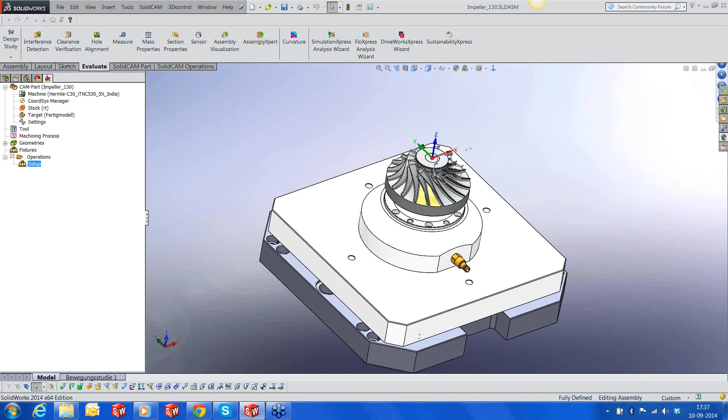We're going to see how iMachining combined with simultaneous 5-axis helps us to machine this impeller. Generally, the impellers are done using a different process from what you're going to see today, especially the roughing. The first portion of the part is turned, and what is turned basically is this particular profile. This profile is completely turned. It's either turned on a regular 2-axis lathe, or even in some cases these are milled on 3-axis machines.

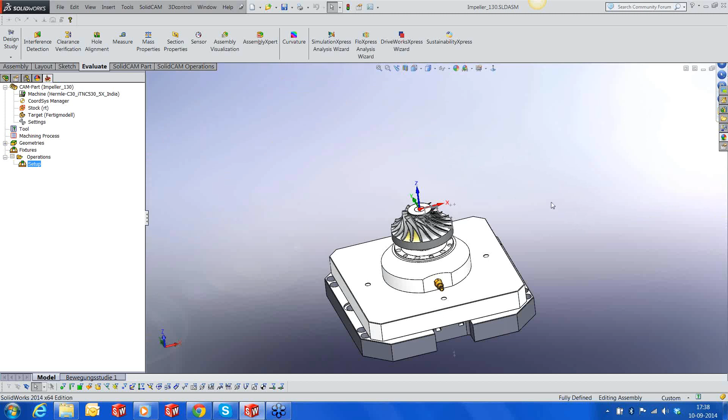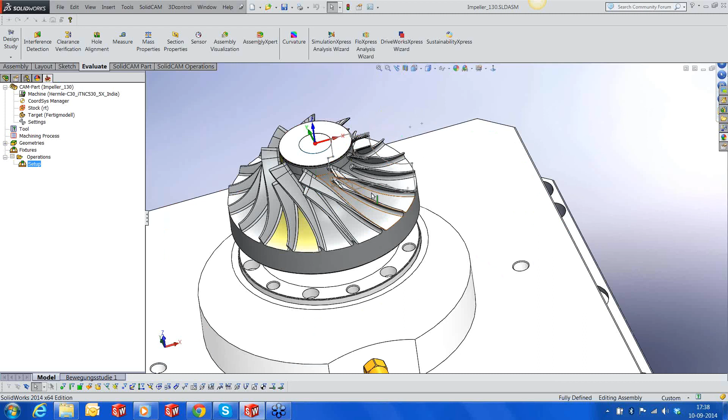But today, because this particular customer ABC has only one machine, and that's a 5-axis machine, he doesn't want to cut in 3-axis and then do 5-axis roughing. He wants to challenge, he wants to improve his productivity by cutting down on this roughing time and finishing time of this particular area, and then machine the entire impeller blades using simultaneous 5-axis.

Right, so what we have today, to start off with, I've used a Hermle C30 machine on which this part is going to be cut, and we have the impeller model and a fixture that's going to hold this. And this is a pretty nice kind of fixture. It's a positive holding. It has got extremely rigid holding, and my machine is also pretty new, so I could really be aggressive in my cutting parameters.

So what I have done today is I have selected Hermle as my machine, and we have used 16MnCr5 material to cut this part. 16MnCr5 has an ultimate tensile strength of about 680 megapascals, and there's a new feature that's come up in SolidCAM 2014, and that's the machinability factor.

Many times when you take up a particular UTS, or the ultimate tensile strength, SolidCAM generates a host of cutting conditions in iMachining, and then you pick one of those cutting conditions and take it to the machine, and then you realize that this material looks to be much harder than what its ultimate tensile strength indicates. Or it could be the other way around. You take that to the machine and you realize when it starts cutting, this material looks much softer than what the ultimate tensile strength actually indicates.

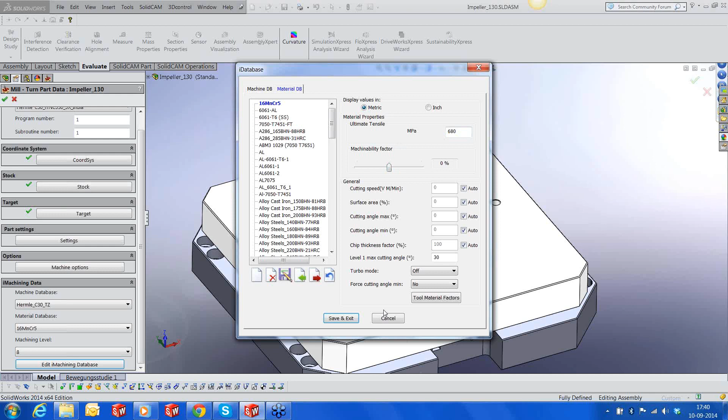I'm going to put it back to 0 and save and exit. We're going to use level 8, so it's the most aggressive level of cutting. Towards the end of this webinar, I will show you a video of the same part using the same fixtures on a Hermle C30 being cut. So you will get a better idea of what this whole thing looks like. All right, so I'm going to accept this.

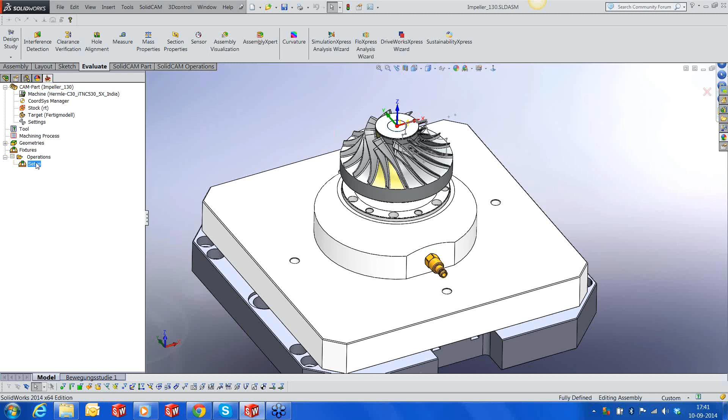And what we have today is we're going to use a 16 millimeter end mill from Hoffmann, and we're going to cut this part. So let me add iMachining 3D. Okay. Tool, I'm going to pick the end mill. This is a 16 millimeter end mill. It's using a Weldon shank, a Weldon holder rather. It's 5 flutes. This is actually a tool from Hoffmann. Okay. Let's select this tool. Its cutting length is 48 millimeters.

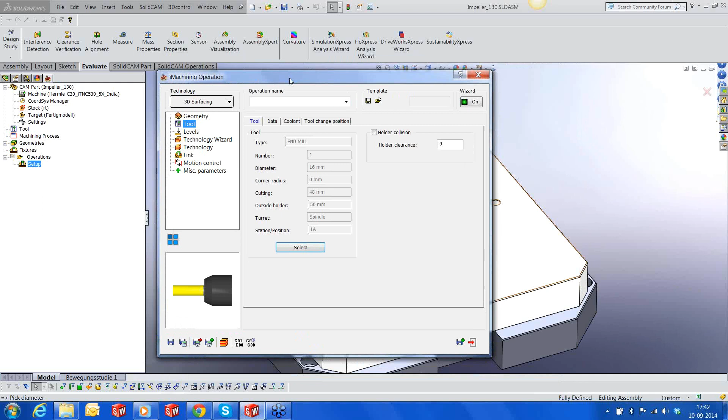Levels. My lower level is actually not that, but my lower level is somewhere on this fillet, and I will give another delta value of about -2, so that I'm going to push that down to -42.247. Okay. We have defined the material and machine. We have the geometry here. We have picked the tool, levels, and then SolidCAM immediately has calculated the cutting condition for me.

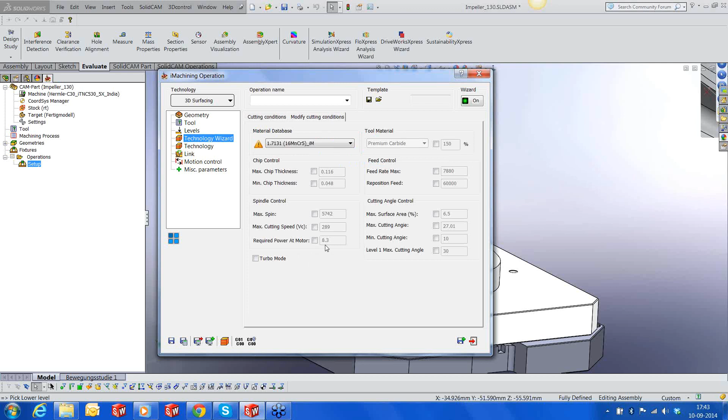At level 8, which is really the most aggressive level that we can have in the regular iMachining, not the turbo, it's calculated an RPM of 5,742, a feed rate of 7.88 meters, a maximum step over of 0.87, a minimum step over of 0.12. That corresponds to a VC of 289 and a max chip thickness of 0.11 with a maximum cutting angle of 27 degrees and a minimum cutting angle of 10 degrees. Now, out of the 15 kilowatts that the machine has on its spindle, it's going to use only 8.3 kilowatts on this cut, which is almost like 50%.

Okay, now if you look back at the tool, this is a special grade from Hoffmann. It's the premium carbide, or what we call the ultra-fine carbide. Basically, you have two grades. We have the normal carbide, where the grains are of normal size, and then there is a fine grade, where the grains of carbide are really very small, much thinner than the regular carbide.

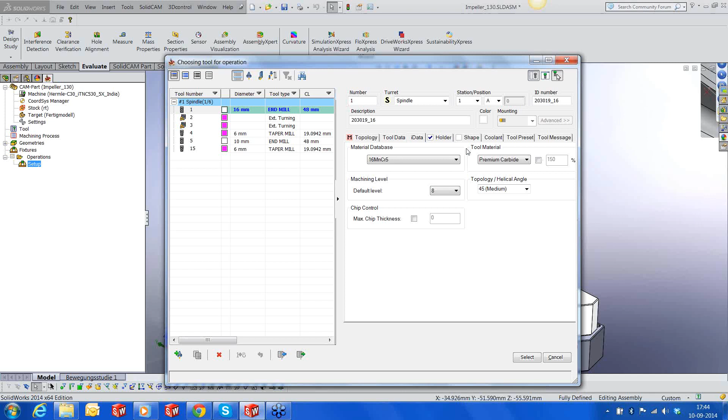In such cases, when the binding of the carbide is much better, the parameters can go as high as 150% of the regular carbide. So this is what iMachining does. It allows you to pick the type of material of the tool. So if I pick premium carbide, it jumps up to 150%. All right. So we have selected this. We have selected our level. Parameters are calculated automatically. Let's go to the technology.

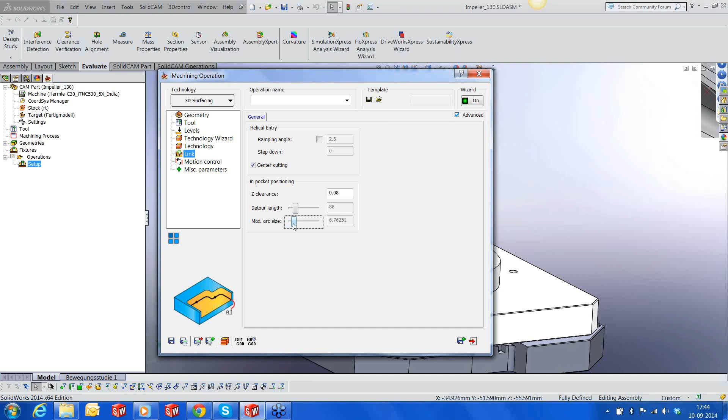I would like to keep about 0.4 millimeter on these walls, and a tool path tolerance of about 4 microns, doesn't matter. Right, and we just need to change our arc size. Since we're using an 8 diameter cutter, I'll get it close to 8 millimeters. Okay, that should be good enough. Okay.

And then we have a new thing coming up again in iMachining, and that's called constant chip thickness control for arcs. Generally what happens in iMachining is it keeps the feed rate almost constant when it's going over the arc, because it generates the pattern in such a way that the chip thickness is maintained constant even when going over arcs, especially the corners.

This particular slider here allows us to decrease the feed rates when it is going over arcs to match certain machines, because on certain machines it is virtually not possible to travel at the same feed rates when going over the arc. Thereby, the feed rate drops and the chip thickness decreases. Thereby, it affects the tool life.

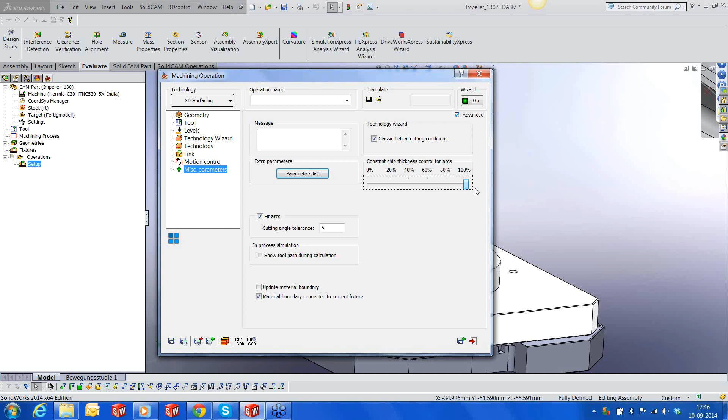We can actually pull down the slider and reduce the feed rate over arcs. This makes it easier for machines, especially the older ones, which can't go at the same feed rate over the arc. It tries to maintain lower feed rates when moving over the arc. All right, this is a new machine, so it doesn't have any such issues. Let me save this, and let's hit the calculate button. This could take about 40 seconds.

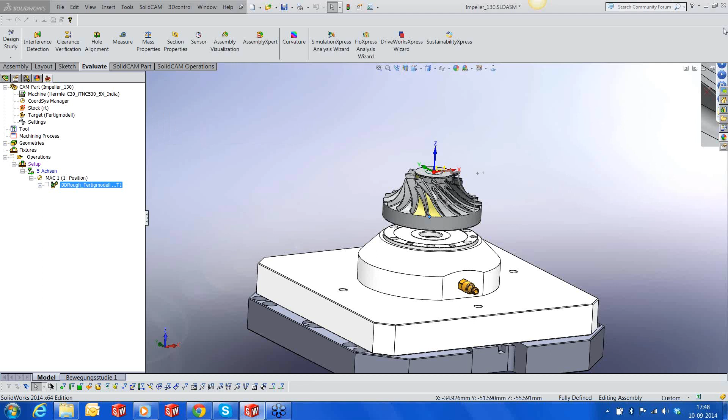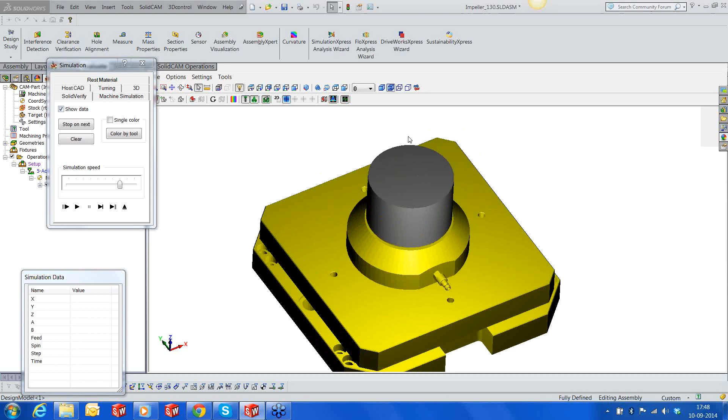Okay, the calculation is done. Let's look at how the toolpath looks. Nice. So that's how the toolpath looks. Let's run the simulation on Solid Verify. So that's how my stock looks, along with these fixture components. Okay, let's zoom in so that you can see it much better. Okay, there we go.

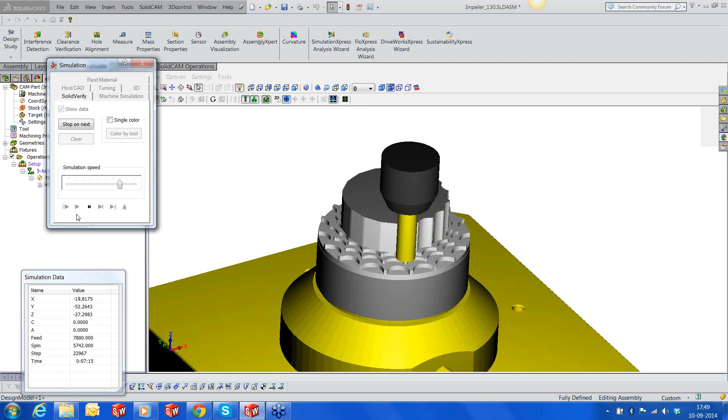It's taken about 40 millimeters at one go, and then it is generating the scallops. This is the step-up technology of iMachining. Since the scallop is pretty high, you can see the staircases coming up. Else you would have seen a very fine scallop. The scallop is pretty high. It's about 2.6 millimeters, so it's creating that staircase kind of effect.

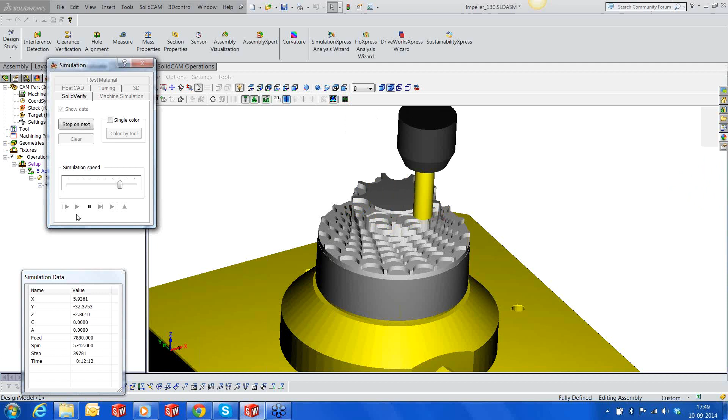All right, so in about 12 minutes, it has roughed out this part. Sometimes it looks like it's even faster than turning it. So we can straight away do iMachining 3D, and it's ready for machining. All right.

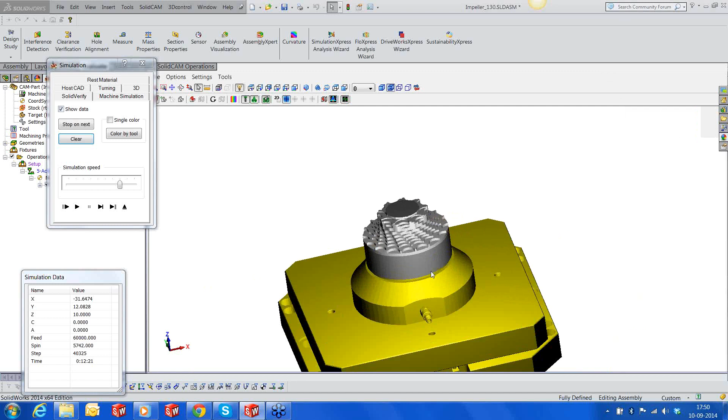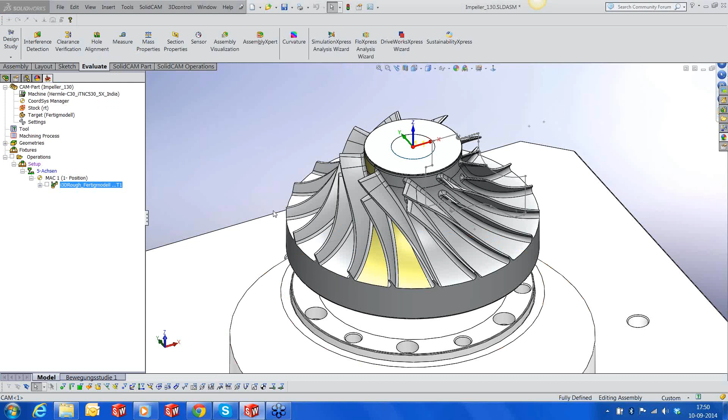So once we have the roughing done, let's move to the next toolpath. These are basically 5-axis toolpaths. So I'm going to start with the roughing of this blade area here. For that, I'm going to use multi-blade machining. This is a special module inside SolidCAM, or rather an application-based module which is meant only to cut impellers. It doesn't matter what kind of impeller, but it is meant to cut only impellers.

So what you have is a very simple interface. We have first a strategy. We have 3 strategies: offset from hub, offset from shroud, offset from hub and shroud. Now, because this is an impeller, if you look at the blades, the width of the blade on the trailing edge and the width of the blade here is different. The width of the blade on the leading edge is much bigger than the width here.

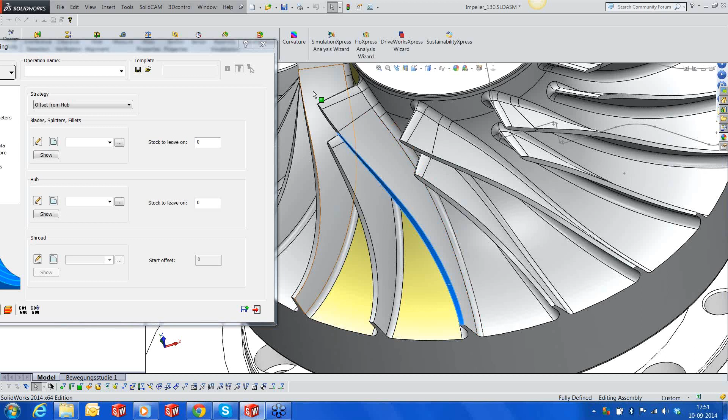So if I use morphing between the hub and the shroud, I will have several passes which will cut nicely here, but when they come back on this side, they are actually going to rub. They're not going to do anything because of the morphing technique. Which means that I might end up having a problem or lower tool life because it's just rubbing. So I'm going to use a different kind of technique this time.

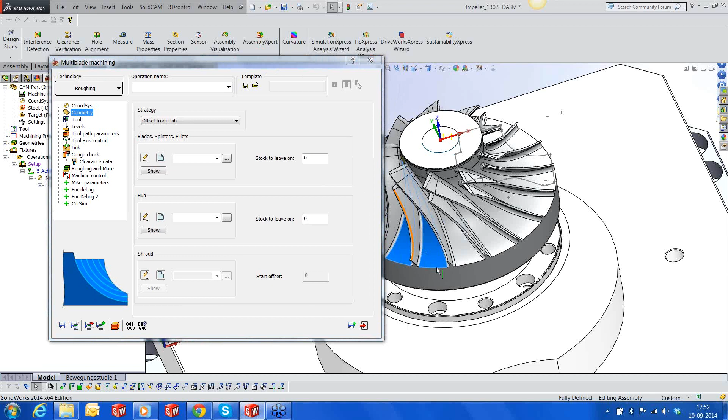I will use offset from the hub that is parallel to this particular surface. In such cases, we will not have the issue of tool rubbing because the distribution of cuts will be according to this particular surface.

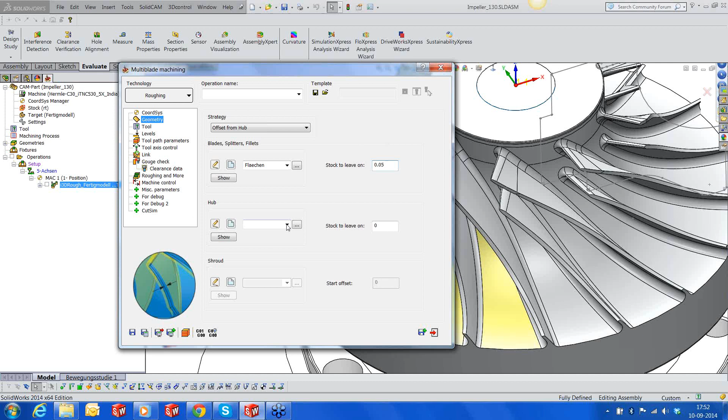All right, so we're going to pick the first set of surfaces. Those are the surfaces, which is basically the blades, main blades, and the splitter, including the fillets. So I will click OK, and I will leave a stock of about 50 microns. On the hub, I would like to pick this surface up here. Select OK. Maybe 50 microns also on this side.

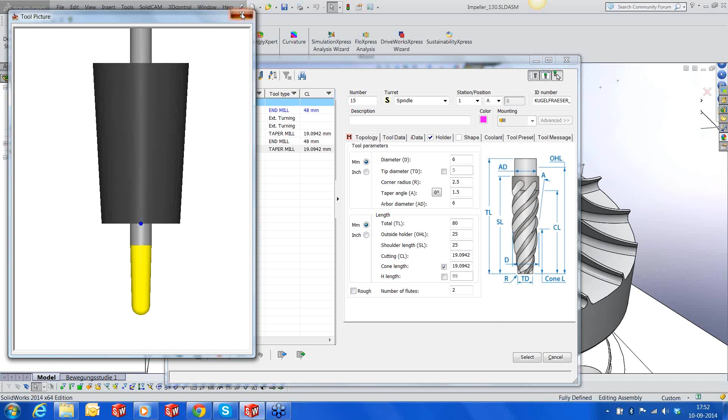Let's go to the tool. I'll select a Hoffmann 6mm taper ball nose. This is how it's going to look like. So we're using the shortest possible tool for roughing. It allows us to be more aggressive with our parameters when you use a shorter tool. On the clearance, we're using a sphere. This is directly from the system. It'll auto detect the position and the dimension.

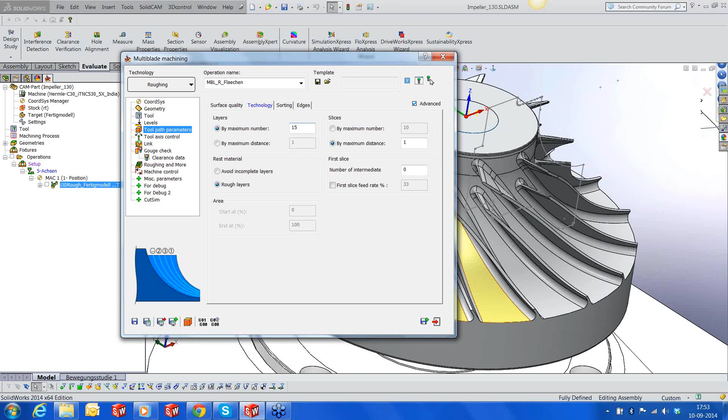The toolpath parameters in the technology, I would like to have a maximum of 15 cuts and a maximum of 10 cuts in the area. All right. Let's go to sorting. It's going to be a zigzag, and it's going to start from the leading edge. That means my tool will start cutting from the leading edge side.

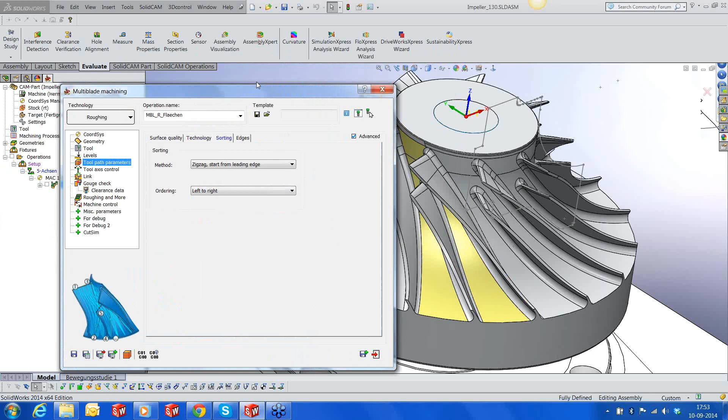And the ordering, we have got about 4 types of ordering. First type of ordering is it will start from this face and it will go up to this face. That we call left to right. Or it could start from this face and end up on this face. That's called right to left. And then you have got another method which starts from the center and goes away to either of the faces, either in climb milling or conventional. So those are the other 2 options. I'm going to use the default left to right, so I'm going to start from this blade and end up on this blade.

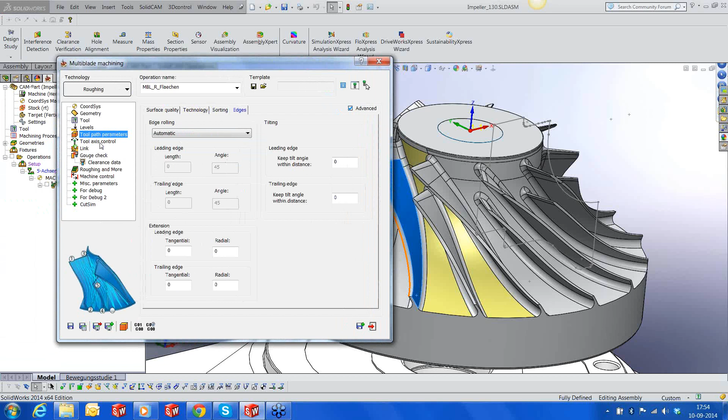Edges, I'd like to keep that automatic. In the tool axis control, you can see that we have very few parameters to work with. What we have new in SolidCAM 2014 SP2 is that earlier we just had one limit angle. Now we have got both the limits, minimum and maximum, so as to take care of machines which can't tilt too much. But with Hermle, we don't have an issue because it goes plus minus 110, so it's a pretty big range. Otherwise, we could control our limits out here.

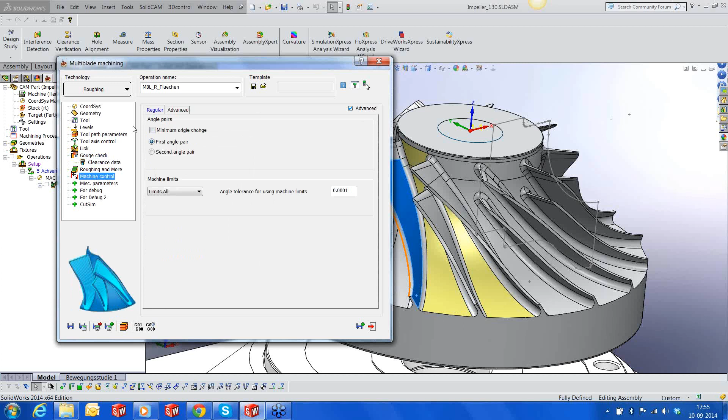Link, again, is automatic. You can see in the application-specific module of SolidCAM, almost everything is automated. That means here the user intervention is kept to a bare minimum. Gouge check only when we need it. All right, so we already have everything. So I'm going to save this and run the calculation.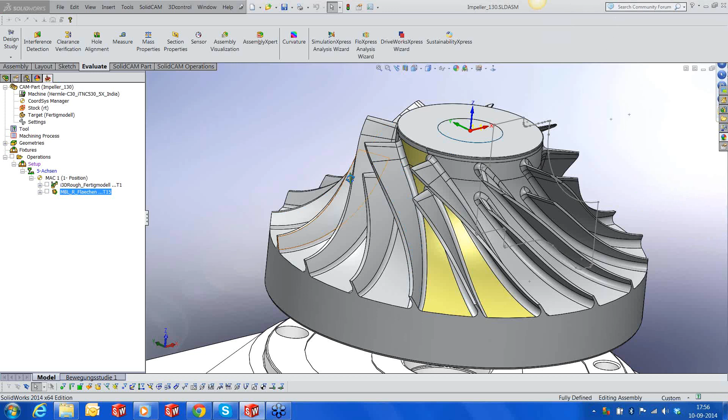The calculation is done. So let's see the results. That's nice. So you can see that there is no rubbing happening on the trailing edge side, basically because the cuts are distributed according to this particular surface, the edge of the surface. So we don't have the rubbing happening.

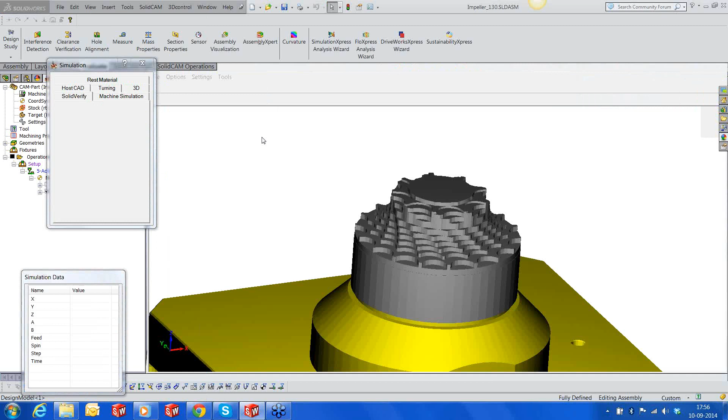So let's run the simulation. Let's go to the Solid Verify, and then we'll also see machine simulation. This is our initial stock. We can start.

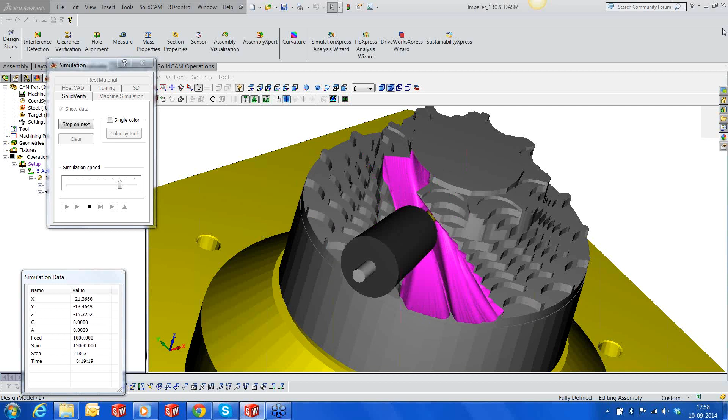This is how our roughing of a 5-axis impeller would look like. Now, since we do have some material left over on the blades, let's also look at some of the finishing options that we have inside multi-blade machining. So let's switch off the toolpath and add multi-blade, blade finishing. So we have got roughing, blade finishing, hub finishing, and fillet finishing. So let's put on the blade finishing.

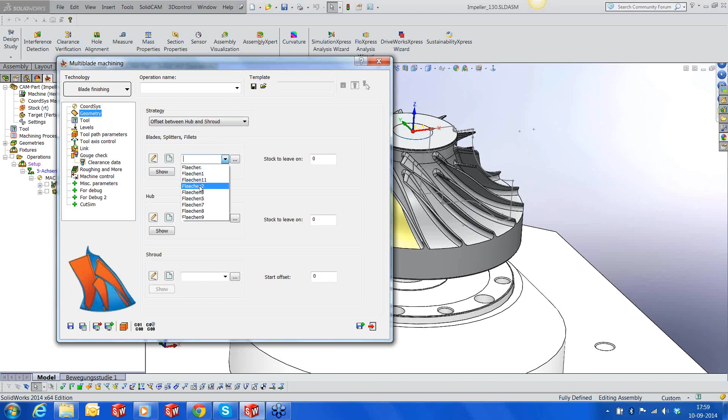Here we're going to use hub and shroud. So let's pick up the surfaces first. Let's check if this is the blade now. So we'll use the browse button and pick the relevant surface for our cutting. So we're going to pick face 3, and the hub basically is face 1.

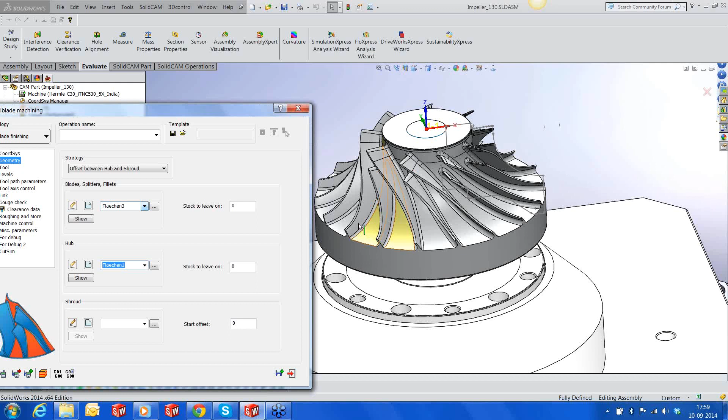It doesn't matter where your blade is and where your hub is, as long as these are surfaces of revolution. It doesn't matter if your blade is here and the hub is there. SolidCAM will understand what you're trying to do because it's an application-specific module, so it will prepare the surfaces internally in such a way that it can be machined. And my shroud, we can pick all of them, although one is good enough. Right, so we'll use another taper ball nose in this case. We're going to use a slightly longer one than for our roughing.

Okay, let's select this. Levels, automatic. Technology, we're going to trim the cuts at the trailing edge. You're going to have about 15 cuts, and we'll start at 2%.

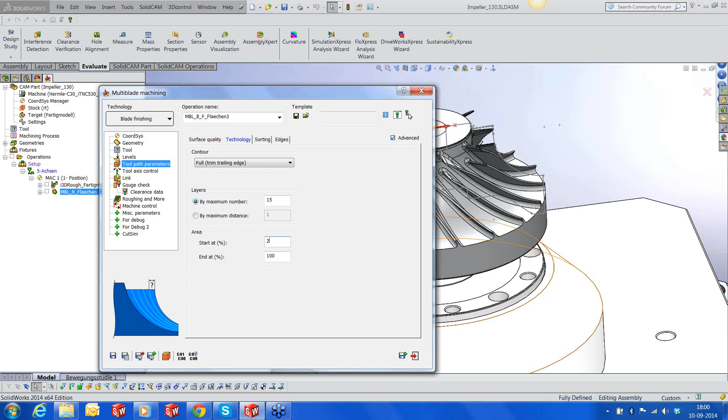Why we are putting the start value is, when we have this edge, this looks a very nice edge to us, but internally this edge could not be a straight homogeneous edge. It could have a lot of saw-like appearance, the saw teeth appearance. So in such cases, the quality of the toolpath is not good because we'll have retracts. To avoid that, we start our cuts about 2% below this particular edge so that we get a nice cut.

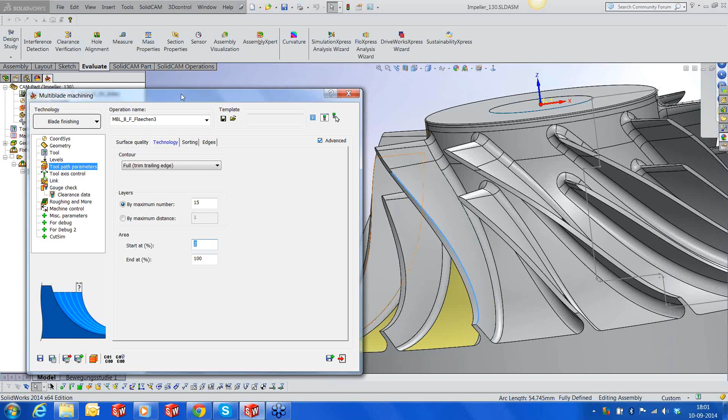Okay, let's go to sorting. It's one way. We're going to start from the trailing edge. Okay, everything else, again, like I said, is default, works automatic. Let's save it and run the calculation.

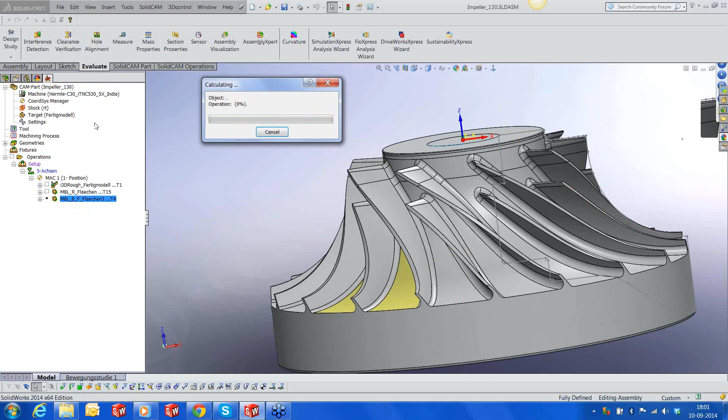The calculations also for multi-blades are very fast. You can look at that. My toolpath is already calculated. You can look at the quality of the toolpath. Very nice and smooth. So it's doing a pretty neat job when generating the toolpath.

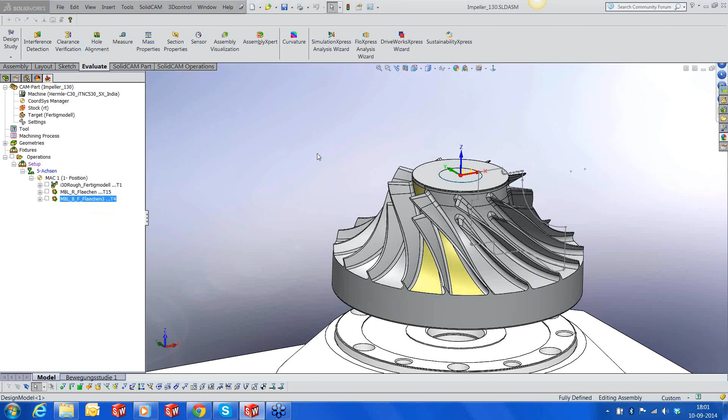Okay. Let's also see some finishing operations for the splitter. Let me not edit, just save and pick the splitter. Let's see which is a splitter here. Okay, this is a splitter.

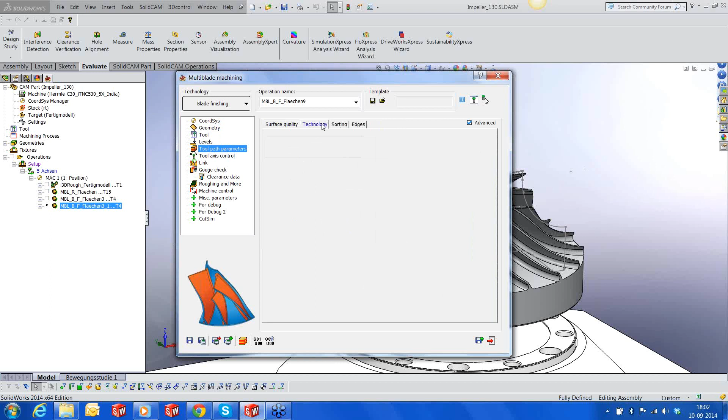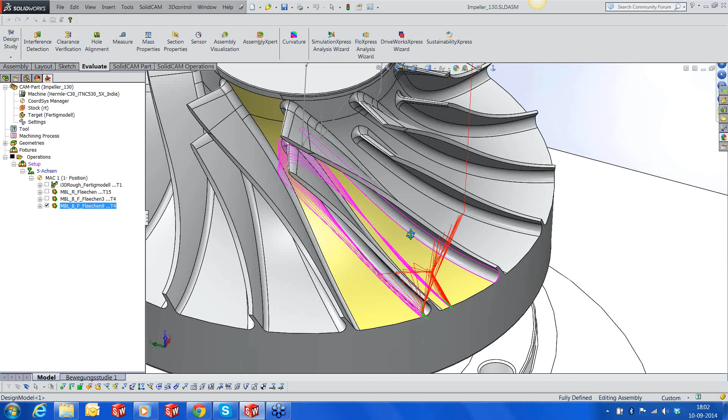The other hub and shroud are going to remain default. The tool is going to remain default. The parameters are going to remain default. In fact, we can add, let's say, 18 cuts on the surface, and let's hit save and calculate. The calculations, like I said, in this application-specific function, they are very, very fast. That's the calculated toolpath for machining the splitter.

Let's also quickly add the hub finishing. So I'll use hub finishing, blade splitters, it's that, just to confirm, yes. And the hub surface is that one. Okay. Let's pick the tool. Not that. That's tool number 4.

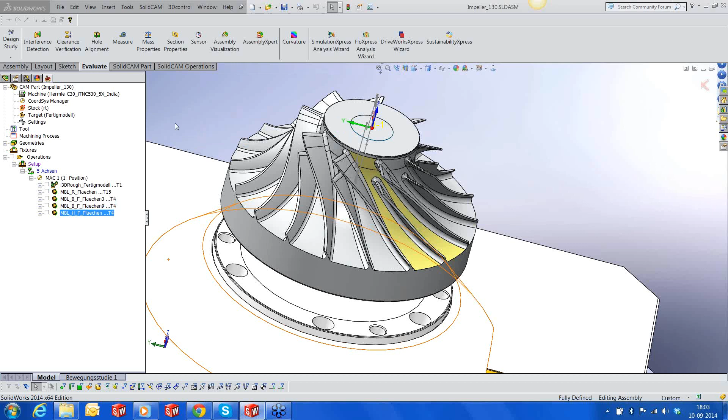Okay, in the technology, let's say I want a maximum of 0.5. That's a step over between two passes. It's bidirectional, starting from the leading edge. Okay, let's save and hit calculate button. Right, that's also done. You can look at the calculated toolpath.

Now what we could do is we could see the first two toolpaths in our machine simulation. For that, let me just change the settings to include the solid or the stock. So let me run the machine simulation.

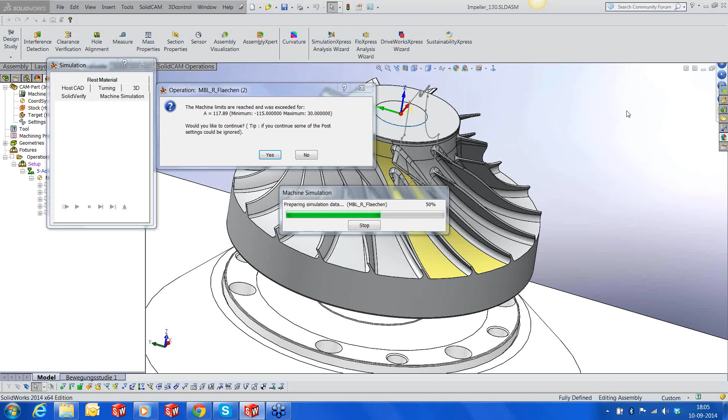Okay, you can see that we have reached the machine limits for one of the toolpaths. So it's giving me a message saying that A-axis has gone beyond 115 degrees, where our minimum and maximum was about plus 30 and minus 115. Let's ignore this error. As I told you, these can be changed, or this can be taken care of in the limits page in Multiblade.

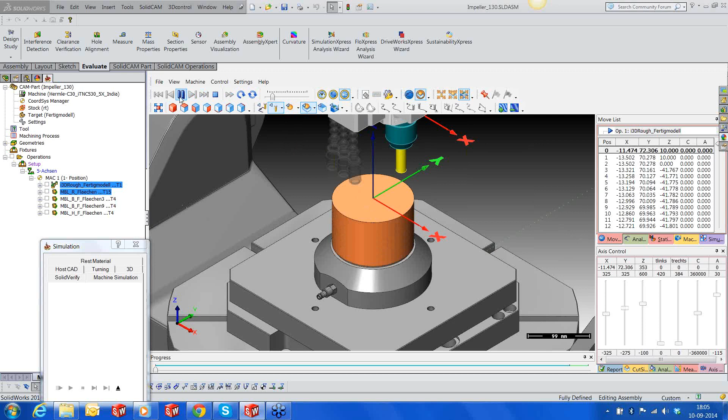Right, so there is my part. Let me switch off the toolpath. So you have the part. I have the stock, so I'm going to switch off the part. And let's run the simulation. Increase the speed.

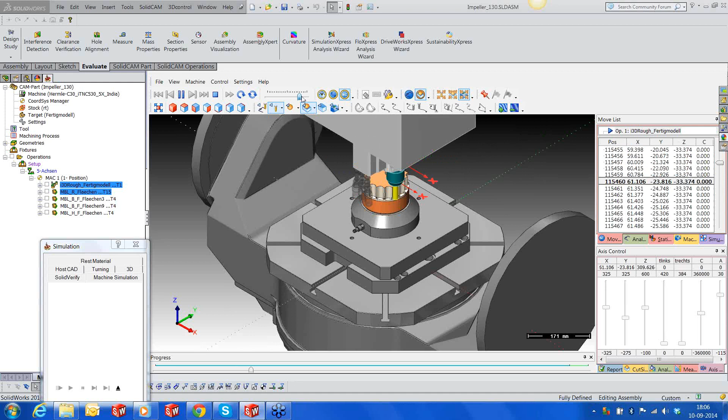Assuming that now I want to move to my next toolpath, having seen some of the 3D machining, I can just select the next one immediately. What SolidCAM does is it internally starts updating the stock that otherwise would have taken a bit longer time. It does it much faster. It's going to take a maximum of about 45 seconds, out of which we have already elapsed 17. And then it uses the updated stock to show us the simulation of the next process.

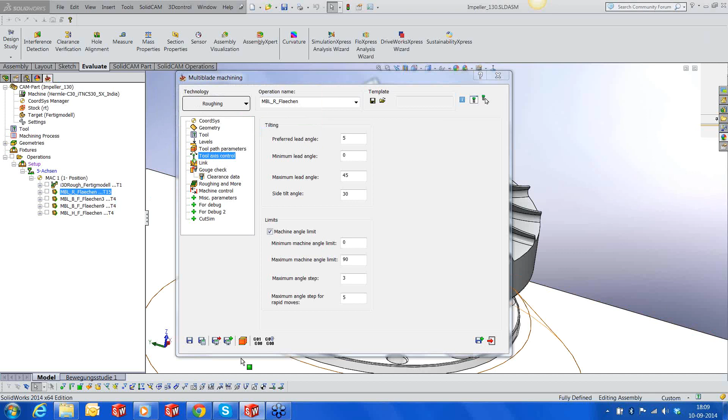Okay, let's run this simulation. Sorry, the machine simulation. What it did in a fraction of a second, I don't think you'd have observed this. It calculated the first stock of iMachining 3D, and then it's going to send the stock to the machine simulation.

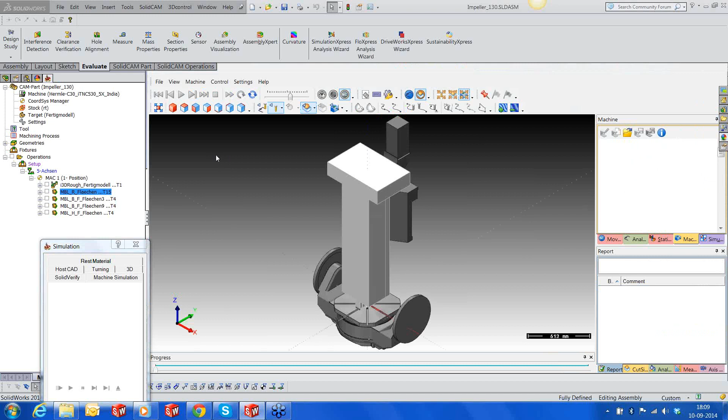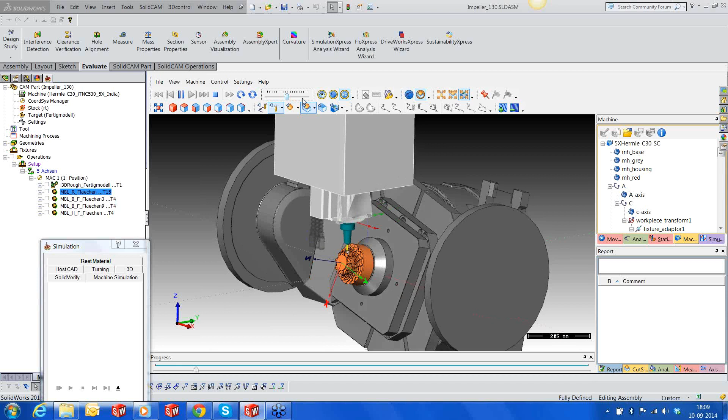Okay, let's see. You can see that we now don't have much of an issue because we have controlled the minimum and maximum angles that our toolpath can take. We can start the cutting. That's much fast, so I'm going to cut down on the speed. That's how it's going to go. We can increase the speed, no problem. After a few passes, I'm going to stop it to show you what the machining looks like.

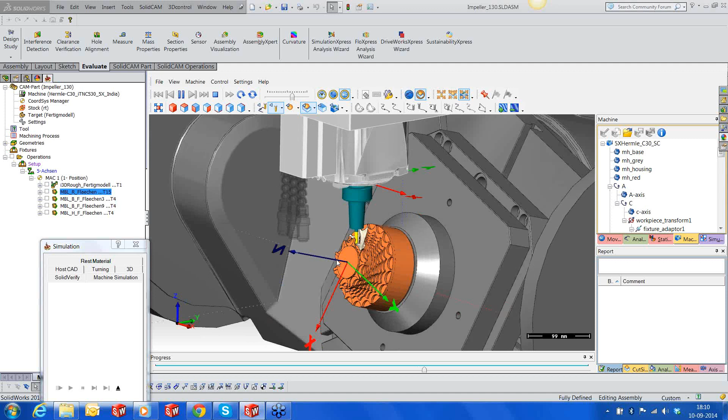Controlling the limit is actually very easy inside SolidCAM. Even in the regular generic 5-axis engine, controlling limits is very, very easy. I've seen users basically break their head when they get into limits because then they have to depend on the post-processor to bail them out. But here, while calculating itself, we take care of the limit, so we don't have any issues with post-processing afterwards. Okay, let's cut down on the speed, and here we can see slowly.

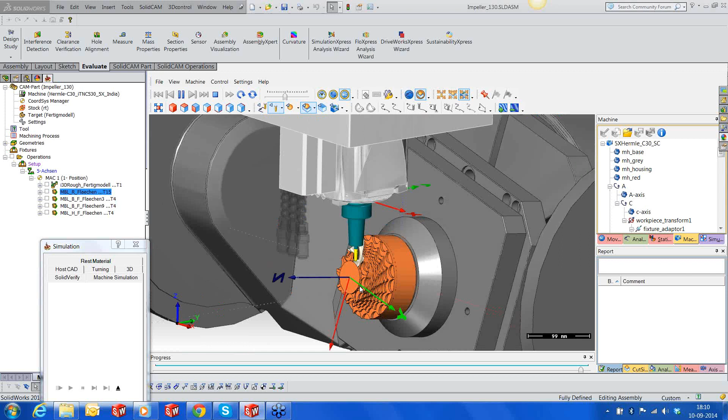That's how it's cutting. Let's stop it. We've seen. What do we offer here in our simulation? We offer a lot of things. First of all, I can go into my analysis and I can run a deviation between the stock at any given point of time. So it's dynamic. At any given point of time, I can stop my machine simulation and I can run a deviation analysis between the part geometry and the stock.

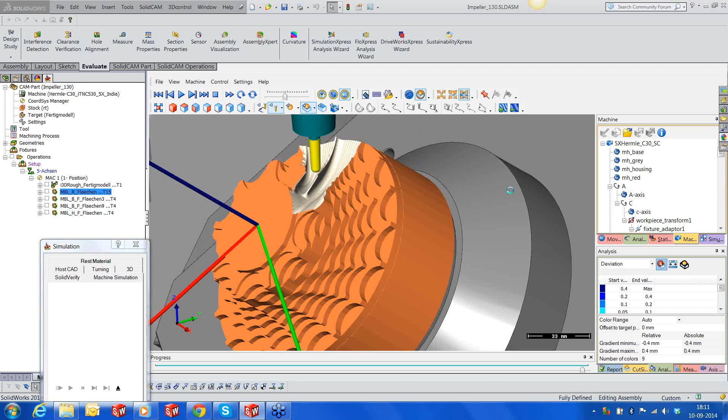You can look at the deviation analysis straight away. So what it is showing us now is different bands of color, and I can zoom in into a particular position. Now I would like to find out what is the material remaining on this particular area out here. Okay, so let me just remove all of them. So I can just hover my mouse to a point where I want to see and select the middle mouse button. So it immediately tells me what's the deviation. The deviation at this point is about 0.06.

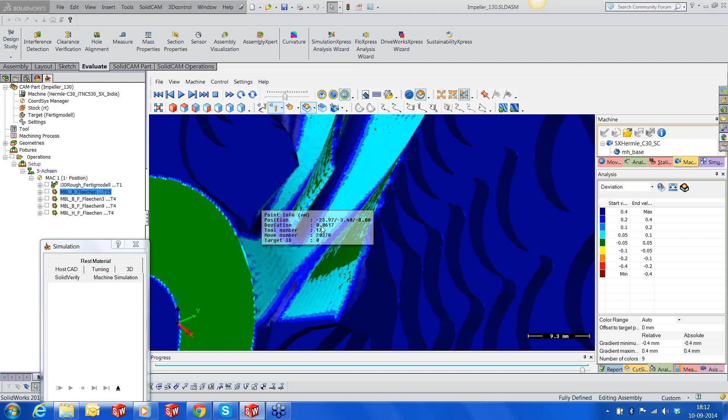So I can check. For example, I would like to check what is the deviation probably in this scallop up here. So I'll select that. That deviation here is about 0.17. That's because of the scallop. We have a higher deviation. So you can do a lot of things. You can check on the deviation. Let's remove all of them.

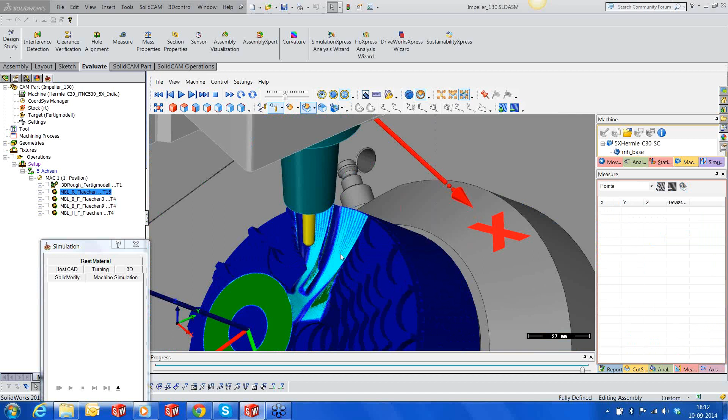You can also check in the analysis the tool number. Okay, now it's very clear. The orange one is basically done by the first tool, and the second color is done by tool number 15. Now you could also check the orientation change. Where did you have maximum orientation change between angles? So a lot of things can be checked.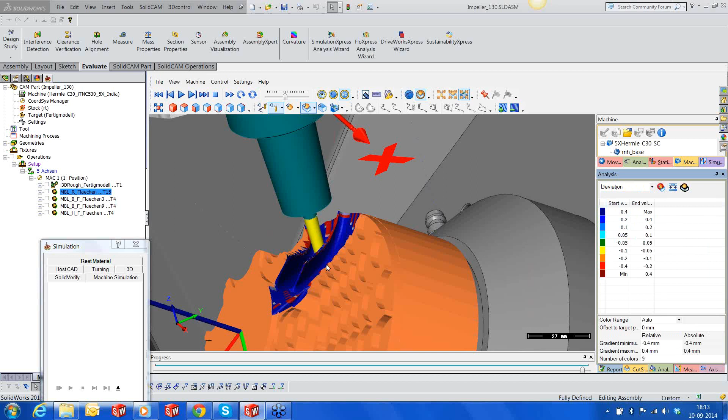Okay, also check height change. So it tells me the difference in height, maximum of 0.4 and minimum of -0.4. Right, you can also check on the deviation. So a lot of analysis of this kind can be done from the machine simulation apart from looking at the simulation itself. All right,

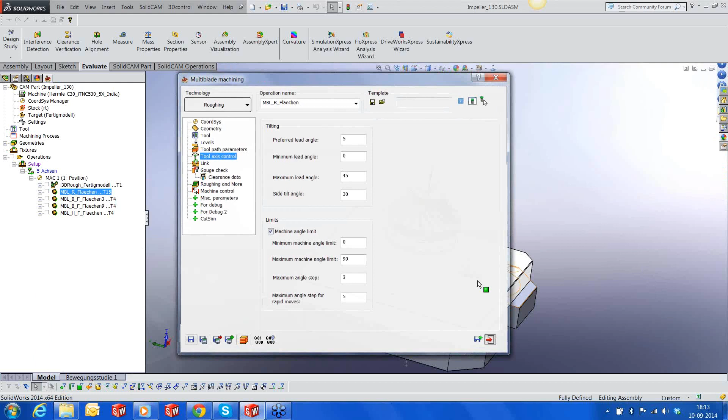let's come out. So we have our toolpath. We saw iMachining 3D, we saw roughing, and we also saw some finishing strategies of Multiblade on how to cut this part. Although this is not a very popular method, this method is catching up very quickly because of iMachining, because of its ability to knock out volume of material much faster, in some cases much faster than turning. So a lot of customers now have moved on to iMachining to knock out volumes. Now, whether this could have been machined this way or not, let's see a small cutting movie. Okay.

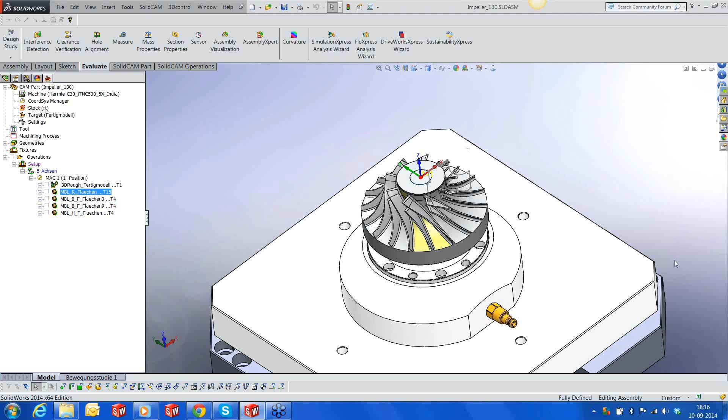How do you change the default stock value in the stock area? I don't know what that means. But let's run into the definition, and I don't know what is the default stock value. You mean to say if these values can be changed? They can be changed, but they have to be changed inside the system. You can't set a value outside the system in some settings or something to change the default values.